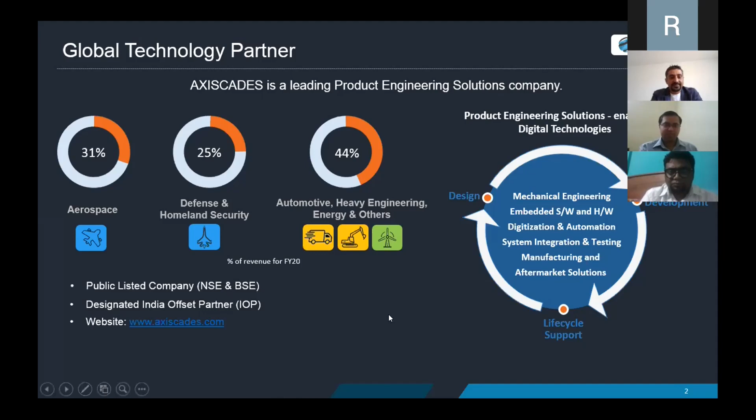So these are our business verticals. We focus predominantly on aerospace, defense, heavy engineering, automotive, energy, and medical devices. When I say these are the key verticals, basically we have a pedigree of close to 3 decades in each of the field.

So we are top partners. We call ourselves the partners to the top OEMs, whether it is aerospace, automotive, or heavy engineering. So this is how we organize. Our services start from the concept design till the manufacturing solutions and to aftermarket sales.

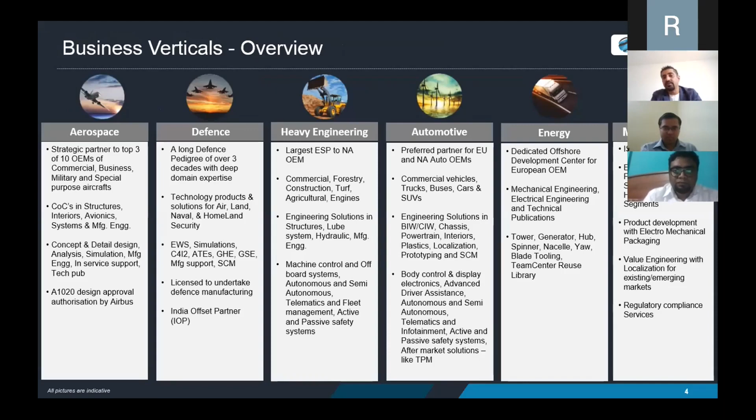If you look at our service offerings, we start from the concept. When the concept is created, some idea is conceptualized, we jump in there with our partners, and from there we help them create the concept designs. From there we help them do the detailed designing, create the prototypes, create the certification processes, and we help them after the sales of the product.

So this is how we are organized. We do the product engineering, embedded and electronics, system integration, engineering analysis and certification. We also help our partners in manufacturing engineering services, product sustenance, and after-sales product services.

We have our units of digital services where we tailor the solutions for the engineering, and we also have our PLM and engineering IT implementation. So this is what is AXISCADES in a nutshell.

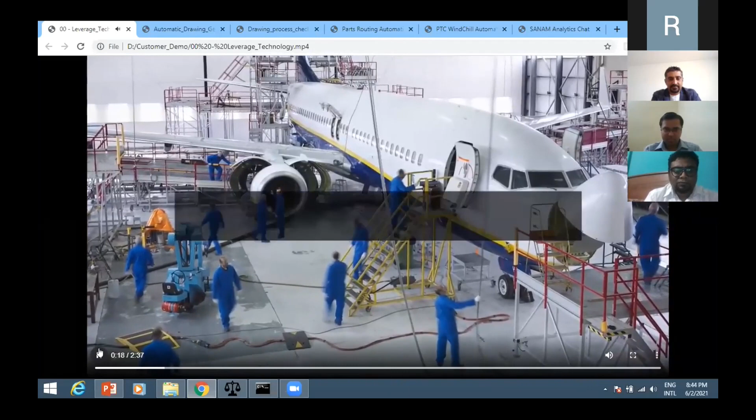We leverage technology for solutions in our known area, industrial enterprise. We provide solutions for agile industrial enterprise. We blend our engineering, manufacturing, and industrial enterprise knowledge with technology to help our customers apply digital capabilities to products, processes, and assets, improve efficiency, enhance customer value, manage risk, innovate and discover new opportunities, and enable insights across enterprise.

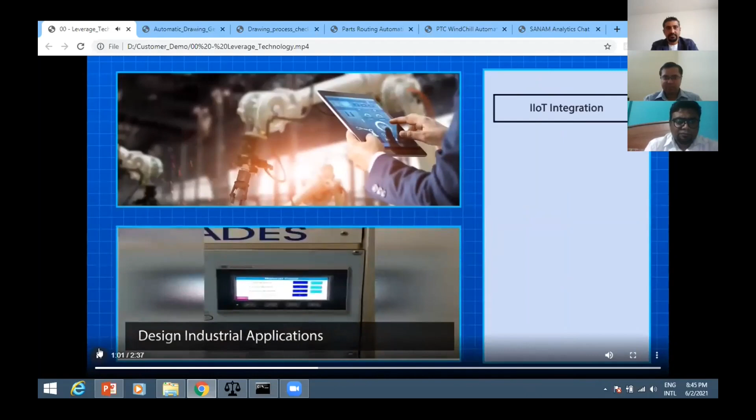We have organized our solutions into 6 horizontals. Connect devices, design industrial applications to view, monitor and control manufacturing operations, and seamlessly collect OT data in real time. We integrate ERP, PLM, SCADA, MES, CRM, and other enterprise applications to a data hub in a decoupled architecture with Kafka as highly available and redundant infrastructure.

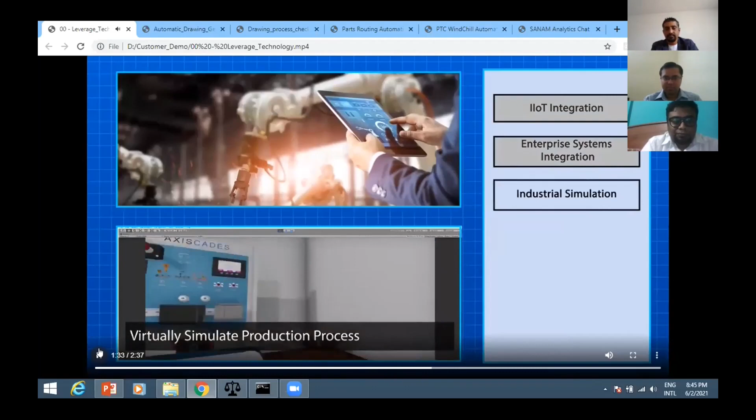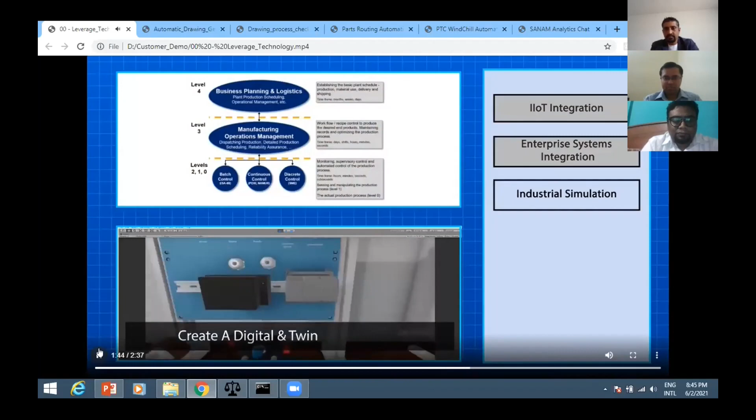Industrial simulation: virtually simulate production process and subsequently plant process before actual production to optimize the control system performance and operations efficiency, and in turn create a digital twin for the production process plant. Enterprise PLM: management of the product lifecycle data based on a product innovation platform. We develop web applications, desktop applications, and mobile applications, including native and progressive web applications.

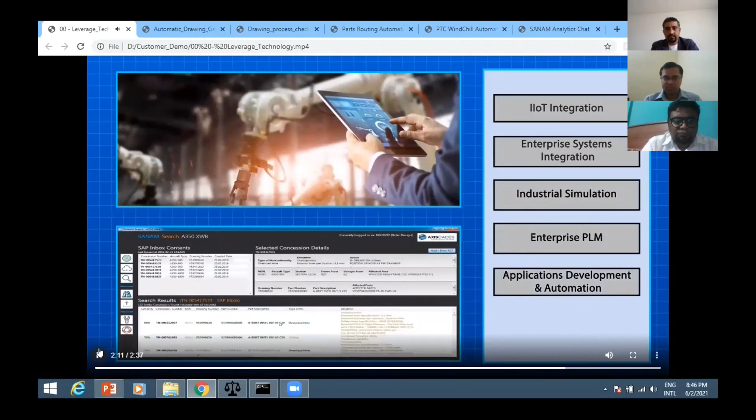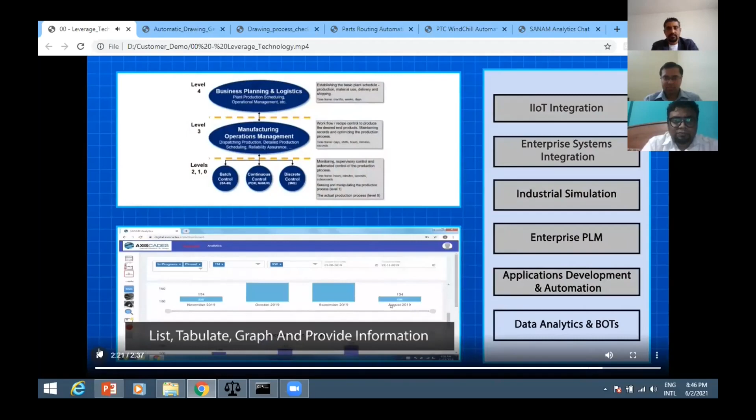We automate mundane processes using robotic process automation, RPA. Visualize, analyze data, and add predictive algorithms as desired with custom applications, and also use BOTs to list, tabulate, graph, and provide information from data with our data analytics solutions.

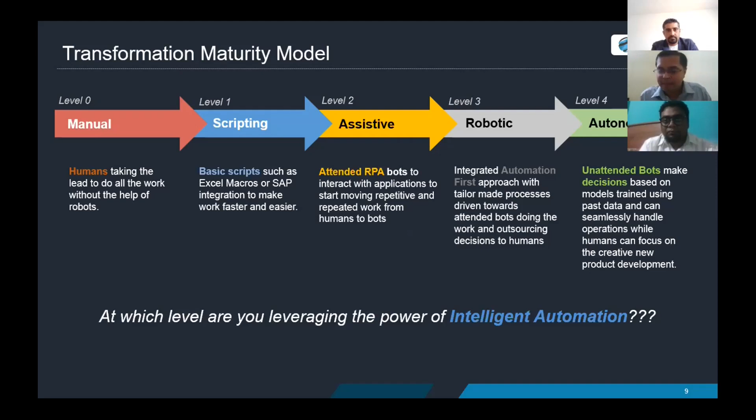So Bharat can take you through automated drawing creation that we've done for some of our customers, which helps to convert 3D models into drawings. Over to you, Bharat.

Yeah. So this is the first case that we want to present in today's seminar, which is automated drawing creation. This was done for one of our aerospace clients. When we received the drawing creation package for a particular aircraft program, this part is basically a composite part, which is known as a stringer.

These are basically longitudinal members of an aircraft, which are present in several hundreds per aircraft. There will be small deviations in their dimensions, and apart from that, they vary from medium to complex geometry. But most of the time, it's similar in terms of shape and form.

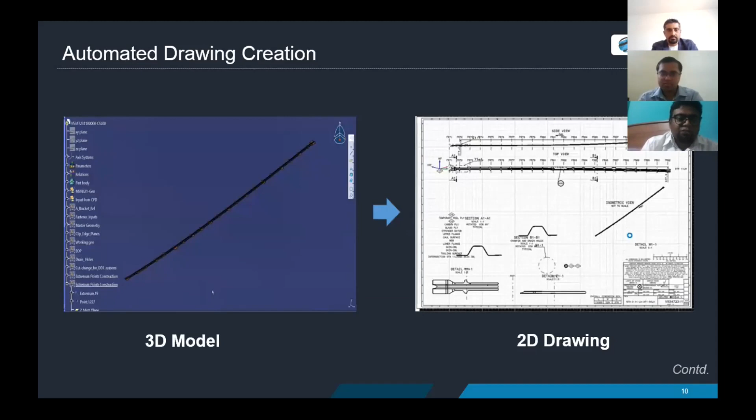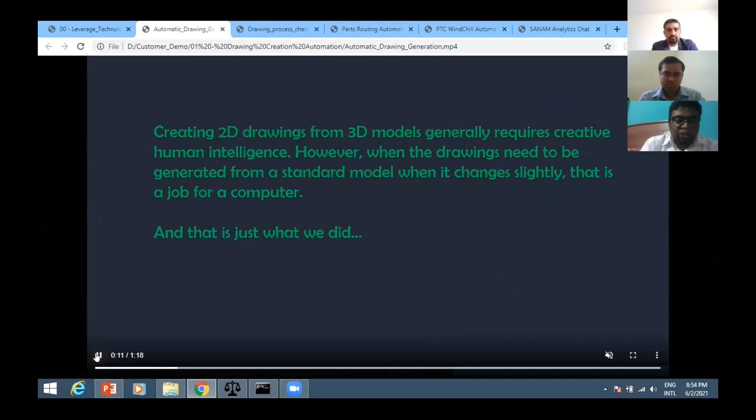So when we received this package to create the drawings with all the information to be presented in sheet 1 and sheet 2, typically a drafter or an engineer would take around 4 to 6 hours for completion, with all the instructions, standards, and views, to make it a more manufacturing-relatable drawing. Okay, so when we received this package, can you pause it, Sudeep, please?

Yeah. So you can see the automatically generated drawing. Let me move over here. In the demo, what you're seeing is that you have loaded the 3D models into the CATIA environment, and using creative intelligence, we have created through VB scripts all the business logic required to perform step-by-step functionality.

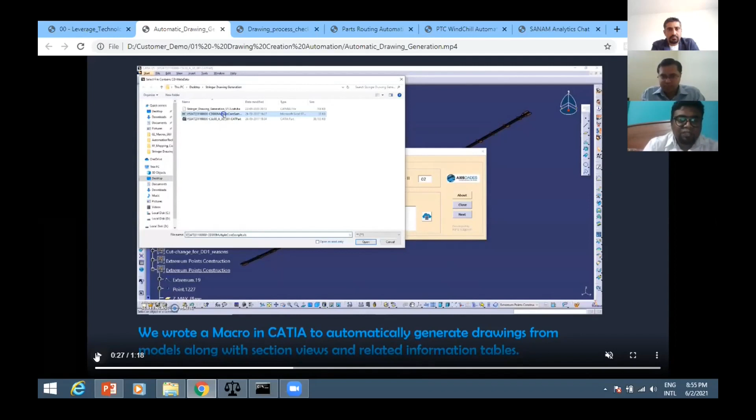So it takes in the basic information in the background once you're keying in and referencing the respective inputs. This part is a composite part, so there is a core sample table, and other necessary information is taken into consideration. Yeah, please go ahead.

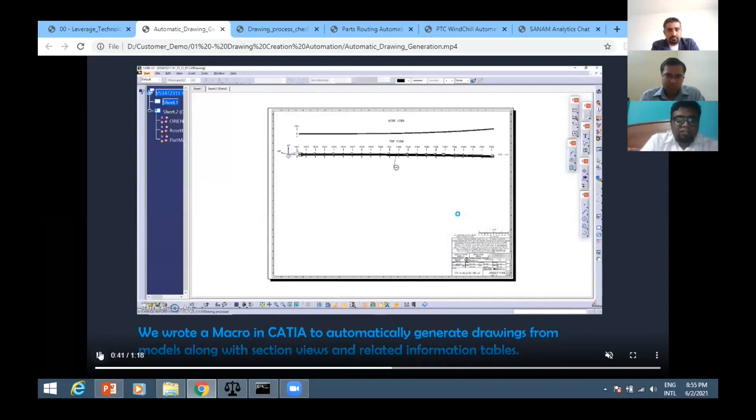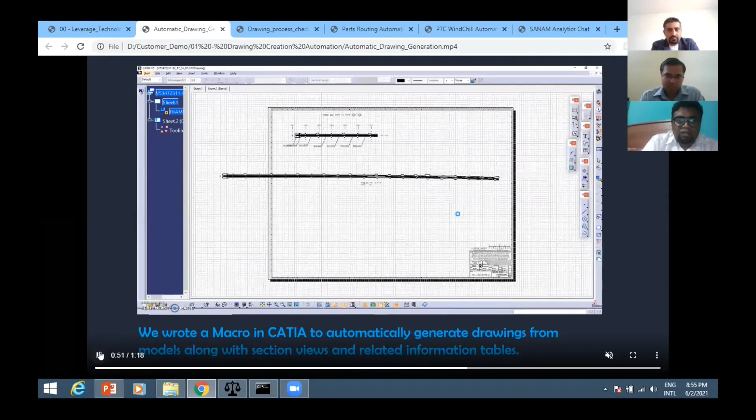So once you key in the necessary information and reference the respective core sample tables, it creates supporting planes, goes into the drawing sheets, and starts creating the views automatically with all the information required for the particular views: the dimensions, the notes, annotations. Now it's moved to sheet 2 to create other sectional views and the core sample tables. Everything just within a minute.

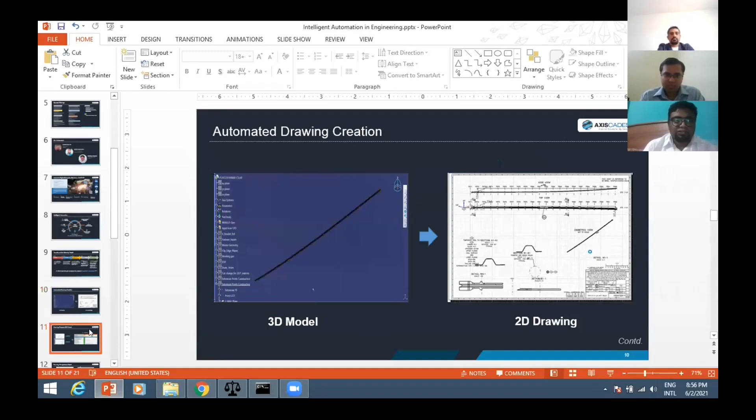So this is the first use case we have done, where it is not only fast, but also maintains the standard of creation. Yeah, you can move to the second one, Sudeep. So the first use case was on the drawing creation process.

Now we have received a lot of automatically generated drawings, and the next bottleneck is going to be quality check. Even though we created the drawing automatically in the first phase, it is up to 60 to 70% automatically generated with the maximum views, and the user still had to spend some time doing aesthetic changes. After that, somebody still has to check all these drawings.

So the second use case for us was to create a quality check macro, which essentially does the quality check using a checklist, the way a QC person would. We understood the entire process of how a person checks it manually, and we built business logic behind it, so that the drawing quality check happens when the engineer or drafter starts the process. You can go to the demo. Yeah.

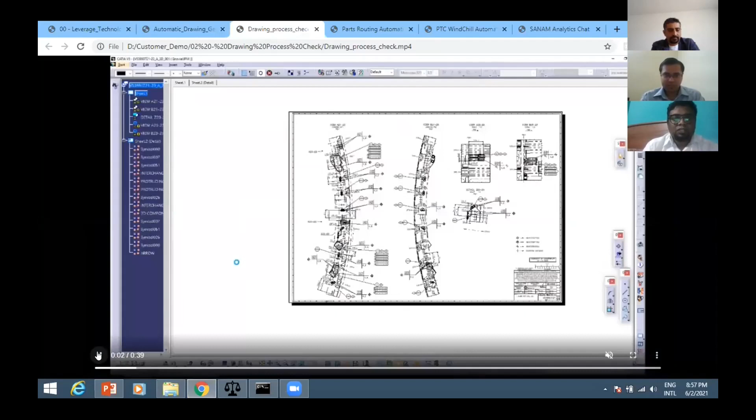So here you are seeing the user invoking the macro within the CATIA environment and keying in all the necessary information required for this quality check. The macro is now interacting with Windchill, which is our CAD data management software for this program. You can see the progress happening at the back end, where it has done all the necessary checks, and then it generates a report with all the status in color coding, and also remarks where the drafter or checker has to concentrate on correcting.

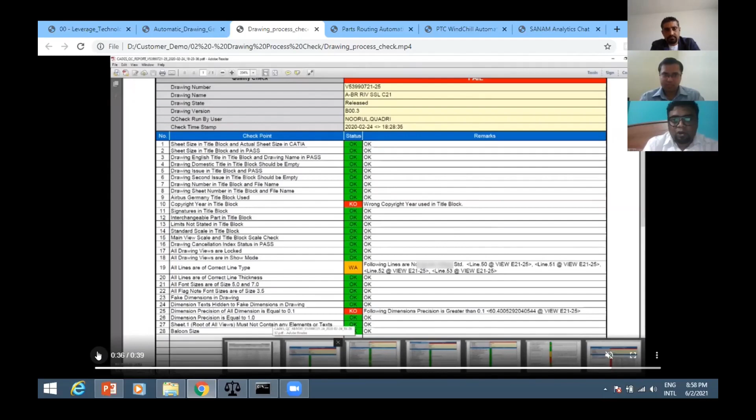Yeah. And another useful and interesting case study we have is the drawing comparison, not a macro, I would call it a bot, which basically works.

The previous one you saw inside a CAD environment, where it was running the macro and doing all the necessary checks. But over here you can use any kind of CAD-neutral formats, like your DXF or your STL or IGS, etc.

And the user loads basically the two revisions. You're seeing here a version A and a version B, where you have your latest revisions and the oldest revisions present here. And you run this option, and it also compares and checks for all kinds of dimensions, notes, and other textual information which are added or removed, and it highlights them in different colors, and a report is provided for the same. So we'll have just a quick demo for the same.

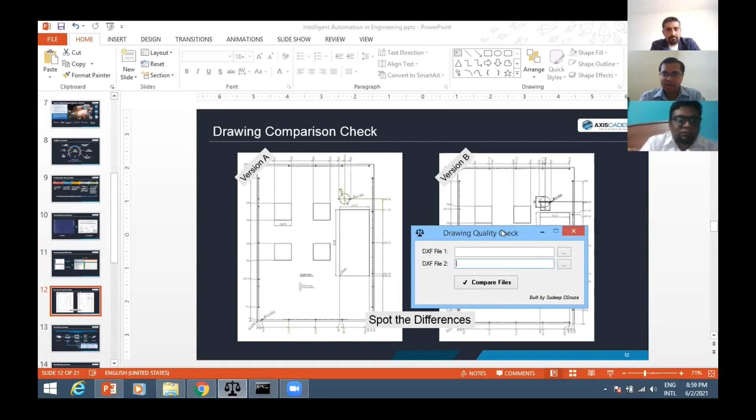Right. So over here, what we've done is we've actually used this to build both a desktop application as well as a web-based application. So what I'm showing you over here is the desktop application. On the screen over here, what I request you to do is quickly see if you can spot the differences. Now, these are two different versions of drawings, and the previous case study that Bharat showed was process checks, which means it checks the drawing dimensions, the drawing tables, the size of the font, etc.

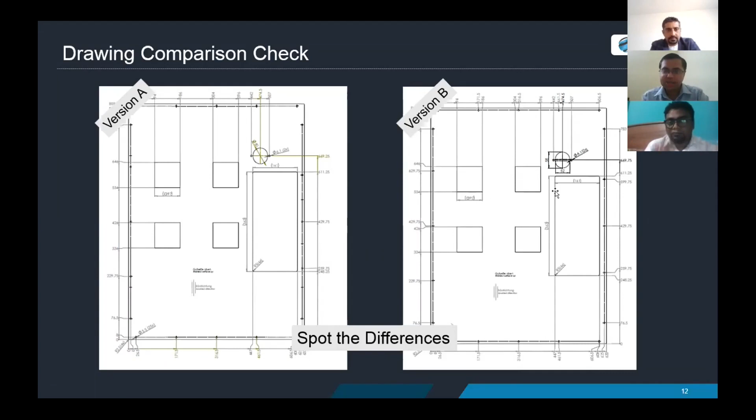But there are drawing checks that you need to do in order to do a comparison to see how the drawing has changed between different versions. Drawing is mostly dimensions, so identifying those dimension changes allows us to identify the drawing changes. So in this case, what I'm going to do is select two drawings of different changes and say compare.

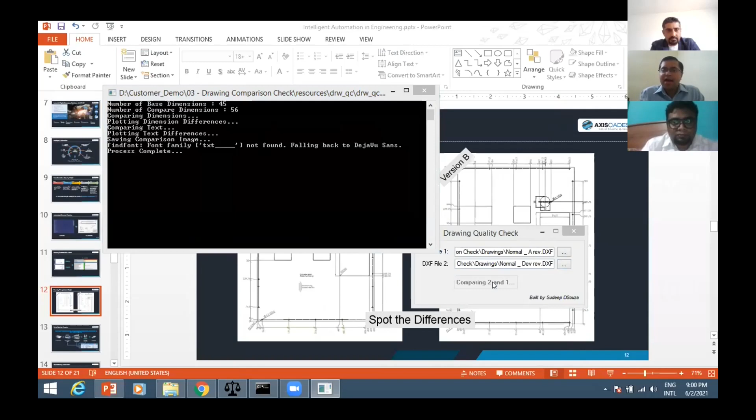So what this does is it goes through those drawings, figures out where all the dimensions are, does a comparison between both of them, and then gives us an output image highlighting the differences on both those drawings. So if you look over here, this is one of the drawings that I've selected. This is the other one. And if I zoom in, you can clearly see that it becomes very easy for a person who's doing quality checks on the drawings to figure out what has changed.

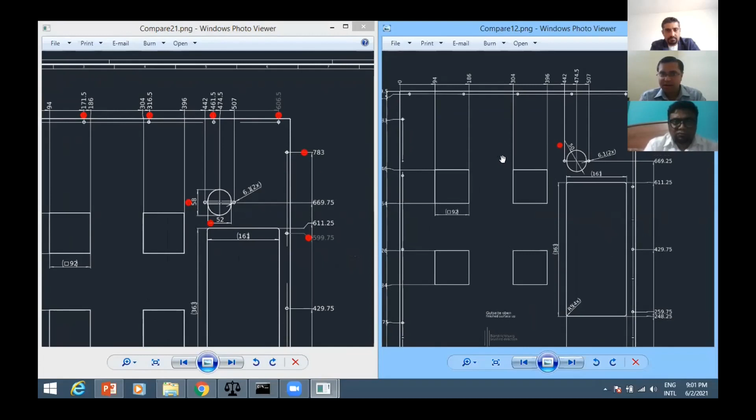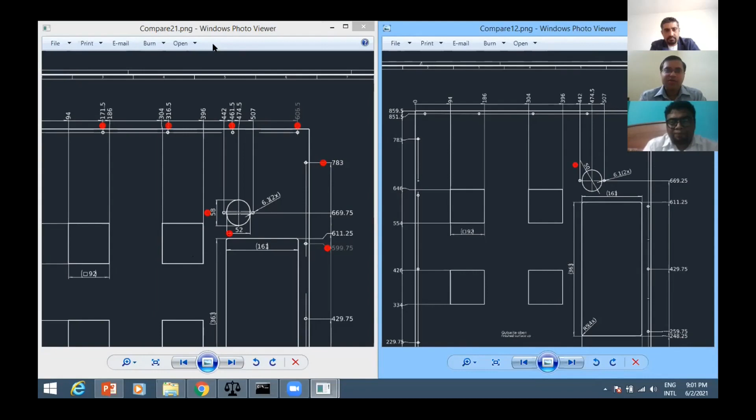So quickly, this has now got a 58 to 52. Those dimensions are not there in this drawing. There's a 50 dimension, which is a diameter dimension that's not there in this one. The 606 is not there over here. The 505 is there. So all the red points that you have over here, those are the dimensions that are missing from this one or changed, right? So that way it becomes very easy for a person who's doing a comparison check to actually figure out what has changed between drawings.

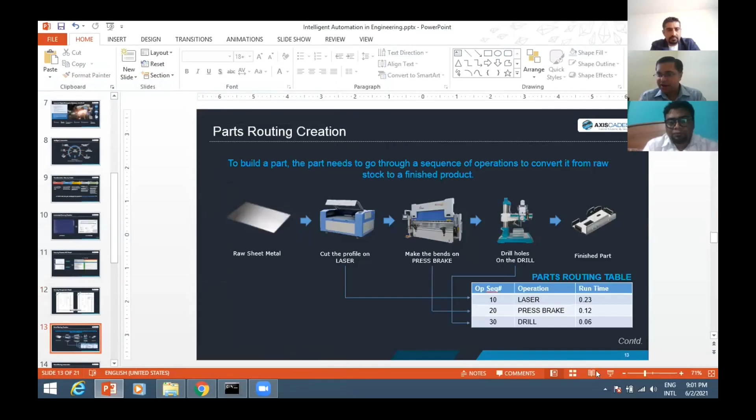Another case study: after we've moved from generation of drawings to process quality check of drawings, we've then done the dimension comparison between drawings. The next step of this entire process of moving from design to your shop floor is figuring out which operations need to be done from the drawings and carrying those forward into the routing that needs to be created for the shop floor. Take this as an example.

This is a raw material sheet steel part that needs to be completed into a finished part. And that has to go through multiple stages on the shop floor. The first thing is it needs to be cut out either on a laser or on a plasma. Then you need to do the bending operation, and then you need to do the drilling operation in order to get those holes, right?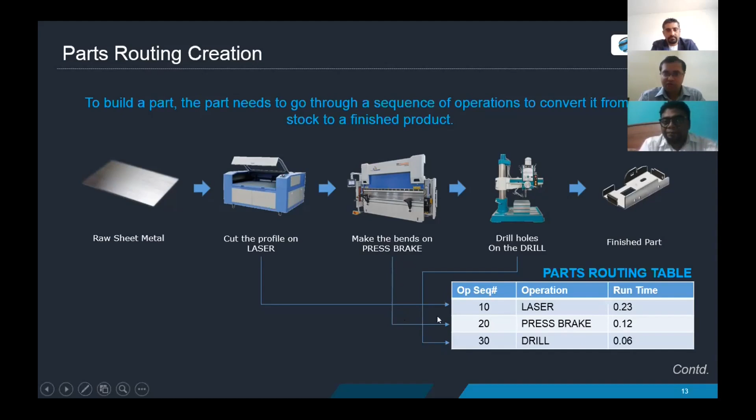So as you move across these stages, the one thing that you need to do is store this information in some system, a PLM system or any system that has information that needs to go to the shop floor on what operation sequence needs to be done on the sheet metal to get it into the finished part. So this quick example says your laser is your sequence 10, your press brake or bending is sequence 20, your drilling is your sequence 30, and so on, right? And then that gives you the finished part. Having to do this manually is quite a lot of work.

For a lot of drawings, people have to open each drawing up, figure out how many bends, what the thickness is, what the material is, compute your standard cutting time, et cetera, in order to push it into JD Edwards. So there could be a lot of materials. It could be sheet steel, it could be a tread plate, it could be a C channel, it could be an L channel, it could be a bar sheet.

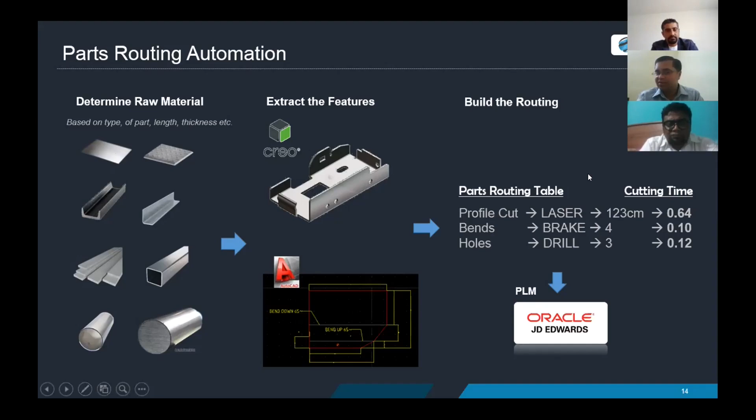So figuring out what type of raw material, which features to extract, how do you convert them, all of this normally is being done by a human. We automated the entire process. So let me quickly take you through a video on that. In this process, like I said, what we did is we automated this entire thing.

We built a bot with an easy to use graphic user interface. You can run it off a batch of parts. You can run it off a single part. You can run it off a single Excel sheet, which contains a batch of parts, or multiple sheets as well. So once we go through this entire method of configuring the tool, what the bot does is it picks up automatically all of this information. It automatically picks up the raw materials. It picks up the features.

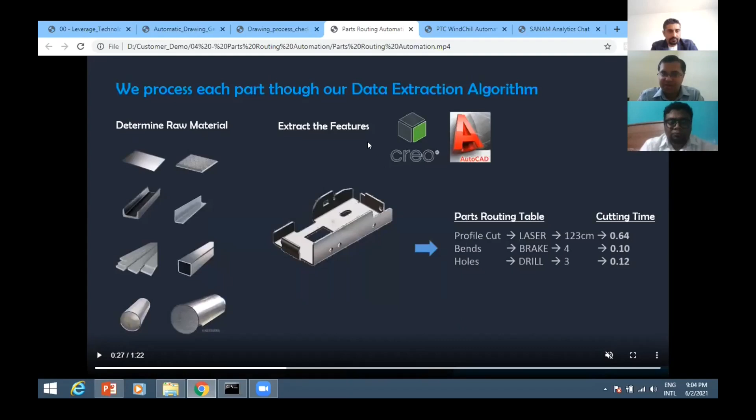We've done it for Creo. We've done it for AutoCAD. Creo is on a 3D model. AutoCAD is on a 2D drawing. And we've done it for both of them. So using that technology that we've built, it does the entire picking up of the raw materials, the number of holes, the bends, the profile cut, determining what type of part it is. It basically automates the download from Windchill, evaluates those parts, figures out the extraction of the data, as you can see that it's doing, and builds this entire routing information.

In some cases, it even asks the user if it cannot figure it out. The tool asks the user, okay, I don't know this information. What should it be? Or I found discrepancies between what you have on the drawing and what you have already in JD Edwards, or whatever your PLM system is. So this section gives us the computed routing of what the application thinks it should be. This is what exists in JD routing if you want to make a change. And you can then choose what routing you want to put into JD Edwards or whatever your PLM system is.

And it now uses robotic process automation to write that information back into JD Edwards. So as you can see over here, it's signing into JDE, and then it can put all the required information back into JD Edwards. So automating this process end to end, all the user needs to do is upload an Excel file. The system takes care of the rest.

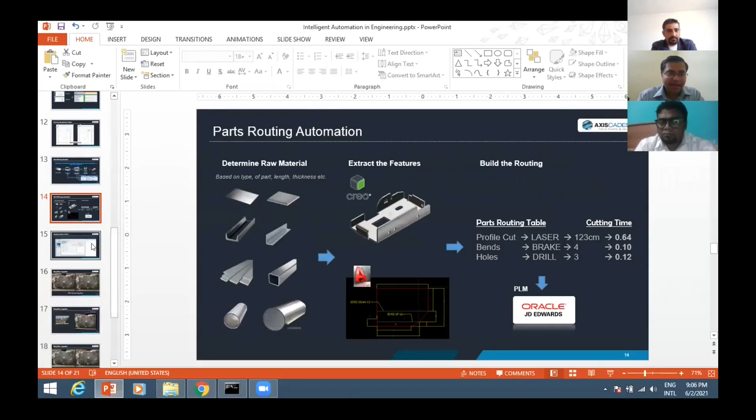It downloads the parts from Windchill. It figures out the raw materials. It figures out the features on the part. It then also uses robotic process automation to upload those parts' routing. It also calculates the standard runtimes, and then uploads all that information back into JD Edwards. This is a big time saving and is much, much faster. For a user, it would probably take an hour per part to do the downloads, the checking, and everything. Our system probably gets it done in less than 5 to 10 minutes. So overall, that is what we do. We use technology to save time.

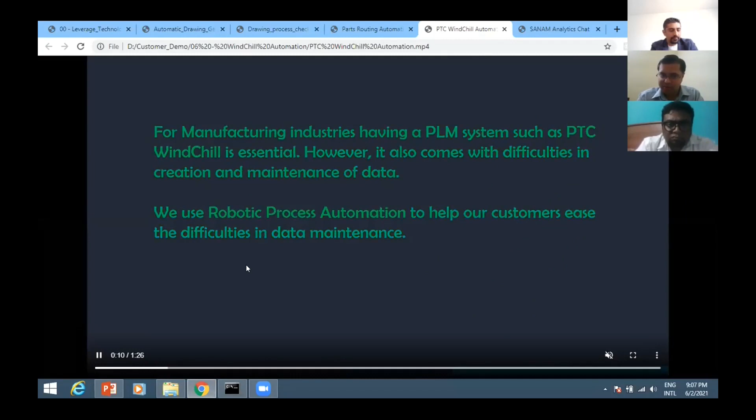We also have, in order to do the maintenance of PLM systems, in a lot of cases, we need to run robots and upload or download data from PLM systems. In that sense, also, we've helped our customers. So we've written bots in order to upload data and download data into PLM systems. In this particular case, we've got a robot which is primarily robotic process automation. There's no intelligence built into this one, but you can see the amount of time it saves.

So in this case, you need to upload variant information into the PTC Windchill system. And what we're doing over here is just that. We've completely automated this process in order to upload data into Windchill. As you can see, this whole information automatically gets uploaded into the Windchill system, and it does it really fast. All of the selections, all of the items that need to be selected, everything happens automatically.

Even in some cases like this, these are Java-based interfaces, and Java-based interfaces are normally extremely difficult to build RPA bots on. But we've even gone to the extent of automating Java-based interfaces using a combination of mouse clicks and optical character recognition.

So that whole stance and the overall time savings that get impacted, or the increase in productivity that we have doing building robots like these for our customers, really, really improves productivity. And more than that, it's even more efficient to be done by a computer, because human beings over time tend to make mistakes. Lethargy sets in. Computers are not affected by lethargy. And because of that, they keep repeating the actions over and over again, increasingly efficiently.

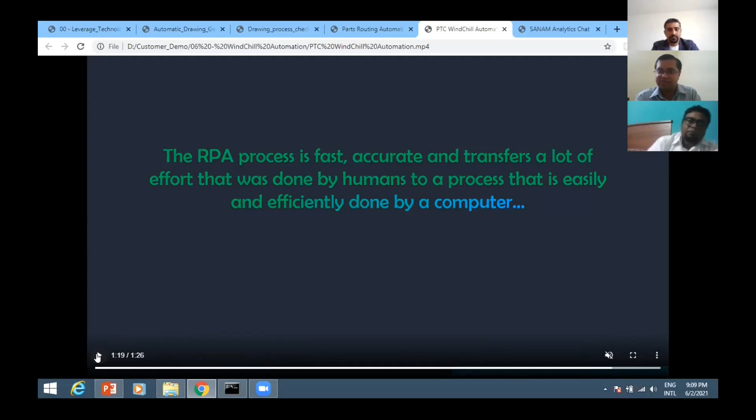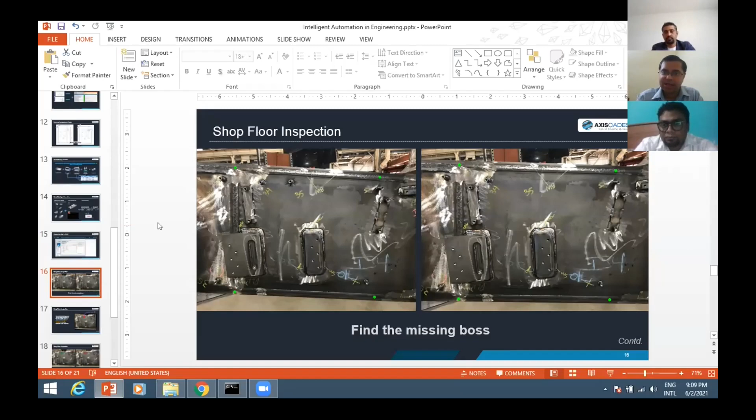So once we have all that information, let's then take a dive into the shop floor. So one of the other interesting projects that we've done for one of our customers is visual inspection. We've done visual inspection on drawings, right? Drawings are digital data. But how do you do that on physical products? Physical products are what we do after we've completed the drawing stage and we've produced those products.

Now, in this case, there are two frames, right? The frame on the left is the frame that is actually the true frame, or what we call the gold standard, because it's got all the information on it. It's easier to visualize this on two different images. The one on the right has the boss missing. So when I'm talking about bosses, I'm talking about these protrusions out here. These bosses are the ones that have harnesses or piping routed around them.

In order to get them easily installed, these harnesses get routed over these bosses so that they just sit neatly in the final assembly. So if one of these are missing by accident, and all of these assemblies are done by people, so it is quite possible for a person to miss out on welding these bosses onto the frames. So say, for example, some of these bosses get missed out.

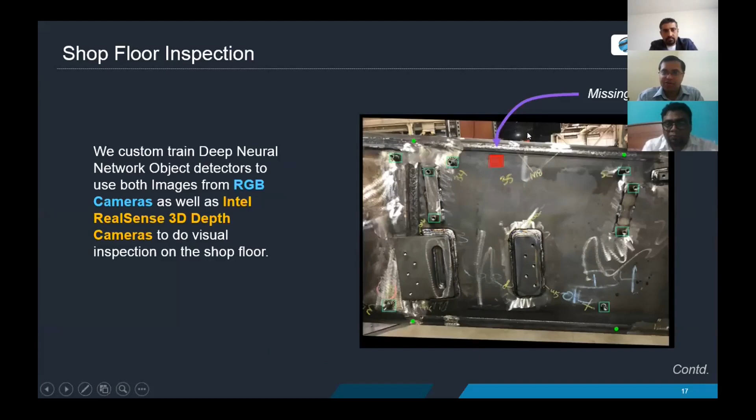In this case, can you identify which boss got missed out? You can see that there is one over here near the number 35, and that one is missing in this picture. So that's the missing boss. Now, having this type of visual inspection done by a human being is also tricky, because he now has to go through a checklist saying, okay, X, Y coordinate, Z coordinate, there is a boss. X, Y coordinate, there is a boss over here. Which boss is it there?

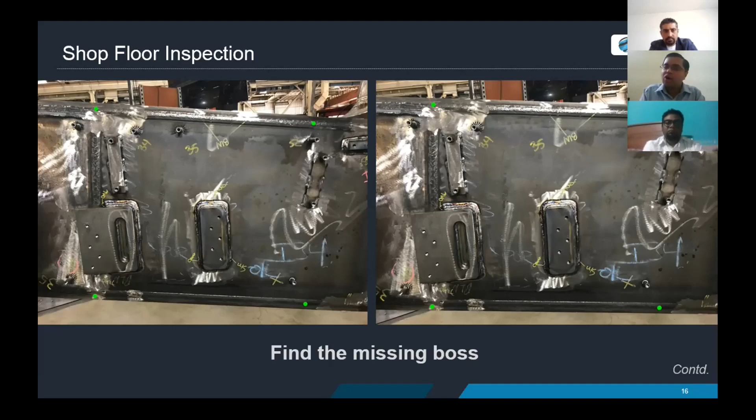Are the ceramics still there on the boss? Because once you weld it, you've got to remove the ceramics. So all of that information also needs to be captured. And having that done by a human being over time, the assembler can make a mistake, the QC guy can make a mistake, and that can also go into production, right? But in order to solve this problem, in order to make it easier for the person who's doing QC, what we've done is we've built a bot to do that.

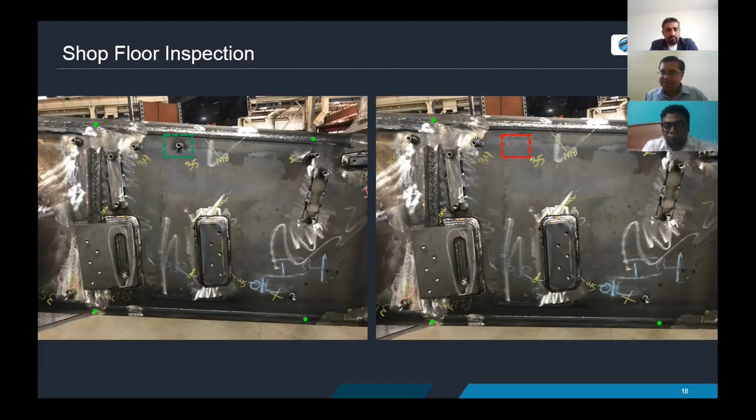So what we do is we have cameras that are situated on the shop floor that capture images at the final assembly point, after the welding has happened, and then we pass this through a bot. So let me show you that bot. In this case, I'm showing you pictures because it's easier to do so. So there are two pictures over here. Those are the same ones that I've actually shown you on the slide, right? I'm passing that through the bot.

What it does is it takes each of the images, and because these images are not aligned, they're from two different locations, they're from two different photographs, we realign them so that they can actually sit correctly on top of each other. Now, the truth information can either come from an image, or the truth information can also come from a drawing. The truth information can come from a model as well. So in this case, I'm using images just because it's easier for us to visualize.

What we did is we built a deep learning trained convolution neural network model in order to detect where these bosses lie on each of the images, overlap the images, determine where the bosses lie, and determine which ones are missing. So in this case, you can see that it has highlighted all the bosses that are there in green, comparing it to this image.

And this is the area that it has found where the boss is not there. And as you can see, it has realigned the image so that it sits correctly. You see these fixture points in green that I've highlighted. So it uses those green points, realigns the image to where it is, and then sees where the bosses are, and overlaps those two images together to find out where the missing boss lies.

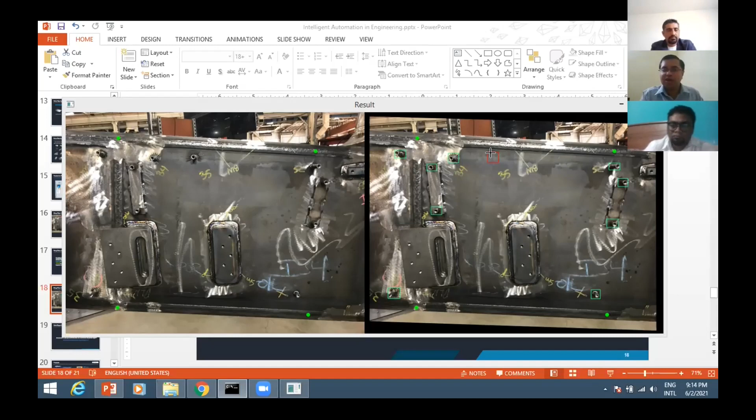And that's the type of technology that we're talking about. What we're doing is using technology to make people's lives easier and make human beings more productive. All right.

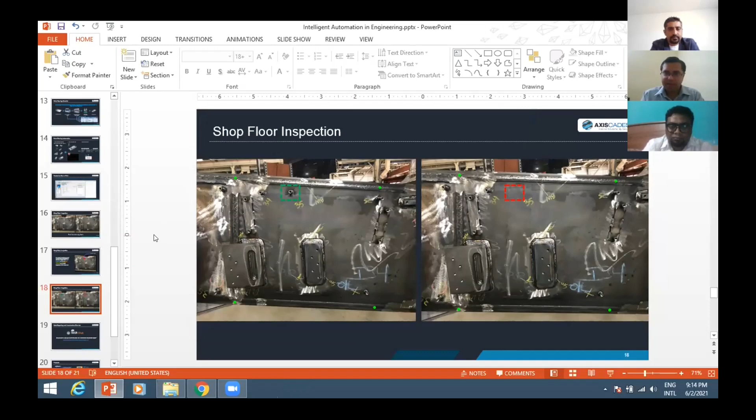So in that whole frame of things, once we're on the shop floor, we need to do time studies in some cases. We do time studies because we need to actually find out where and how to improve productivity. Like I said, the whole intent of what we do is to help people improve productivity.

And in that whole vein of things, we've built a time measurement system. You get time measurement systems in the market like Time Study Pro, but most of them are not customizable for people's needs. And we built this so that we get control over that code, and we can now build these types of applications to meet the needs of our end customers.

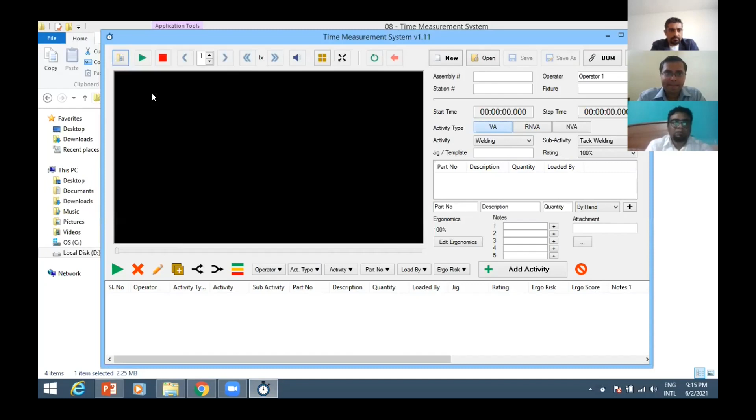So in this case, what we do is we just open a video. I put it on mute because this video is a bit noisy. So we look through the video, and you can see the clock running over here. The clock actually determines where we start and stop these videos, so we can pause it, choose our required value add. In this case, it's going to be inspection, and then he's measuring.

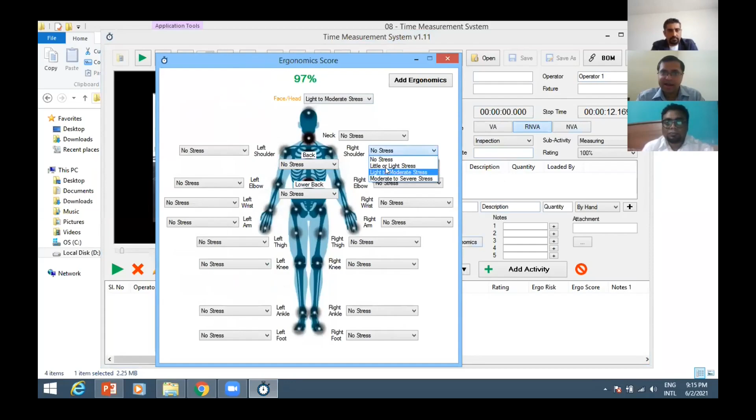We can put the assembly number, the station number, we can choose which operator is doing the work, and a lot of other configurable items over here. We can choose the parts. We can even do ergonomics, because sometimes ergonomics is important, to identify whether it is high left shoulder, right shoulder, determine the ergonomics, and then put notes in and add activities.

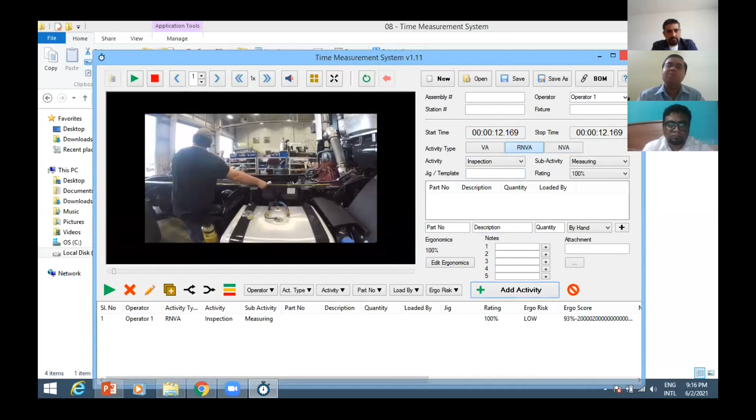So once we do all of this, the whole thing generates out to an Excel file with reports. So what we've got is also a system that we can use to help improve productivity even by doing time studies.

Okay. So that's an entire set of quick demos that I've shown you that we as AXISCADES do to help improve productivity using robotic process automation and artificial intelligence with machine learning to make decisions, like you've seen on our shop floor detection robot, which uses computer vision in order to help improve productivity, right?

Now, once we have all that data, we collect data in several cases. But how do we generate reports? How do we interface with that data? How do we interact with that data set? In most cases, it requires specialized teams of people who know query languages; you need to know software in order to interact and build those reports. You need people who know business intelligence software like Tableau or Power BI.

So in order to help business users, what we've done is we've built a chatbot. This is a custom chatbot that we've built, which you can ask questions in order to allow it to give you those answers. For example,

I'm actually using Zoom right now in order to share my screen and talk, so the microphone won't work because I can only capture one voice audio at a time. But I've also integrated a microphone so you can not only type your questions, but also ask your questions through voice. That helps with the NLP part of our decision-making capabilities. We do speech to text and then use the natural language processing engine in order to convert that information to a chatbot.

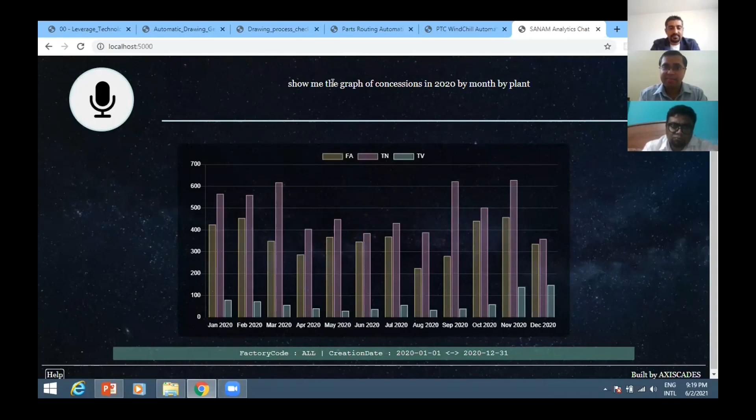I can even get a heat map of concessions by plant by aircraft. Because this was done for an aircraft customer, the aircrafts are coded, but you can see the heat map it gives you by plant by aircraft.

So this is the plants, this is the aircraft. I can also say by plant by program, and you get a heat map count as to how the number of concessions are by plant by program.

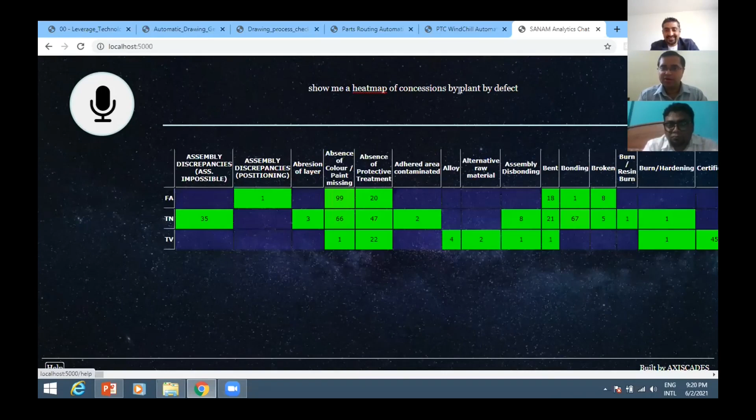Or I can do it by plant by defect, for example. This is really long, so let's just do defect by plant so I can shift axis.

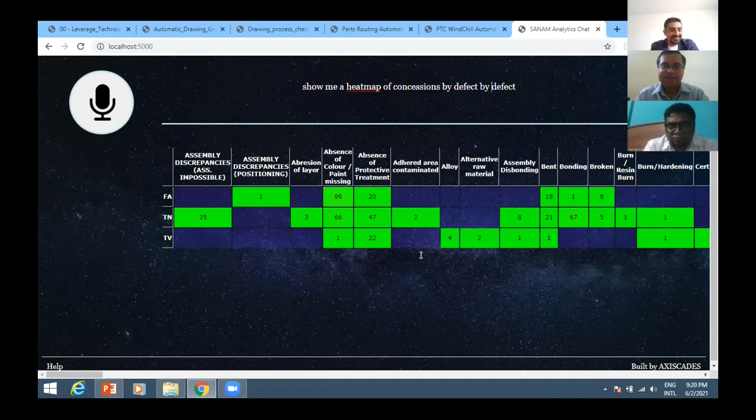Overall, you can see that it becomes very easy to view by plant. I actually gave it by plant by defect, so it gave me an overall view - as you can see, it gives me by plant by defect.

It's very easy now for a normal person or a business user to interact with your data using natural language, use a chatbot to get business related information and data, and present it in a form that's easily used by people.

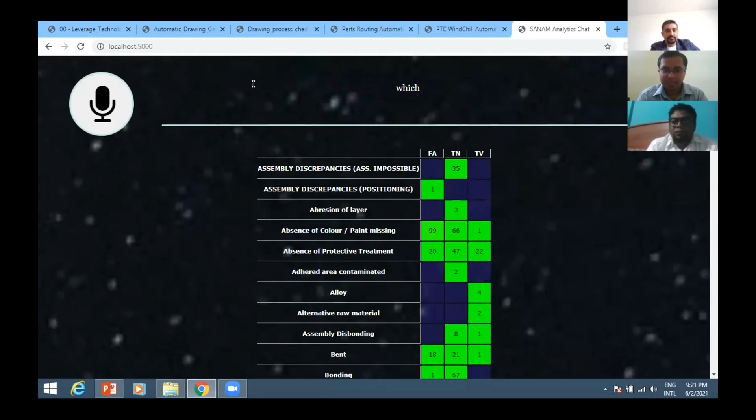I can even ask which month had the highest number of concessions in 2020, and it'll give me this type of data. So this is the month that I had the highest concessions - the month of November.

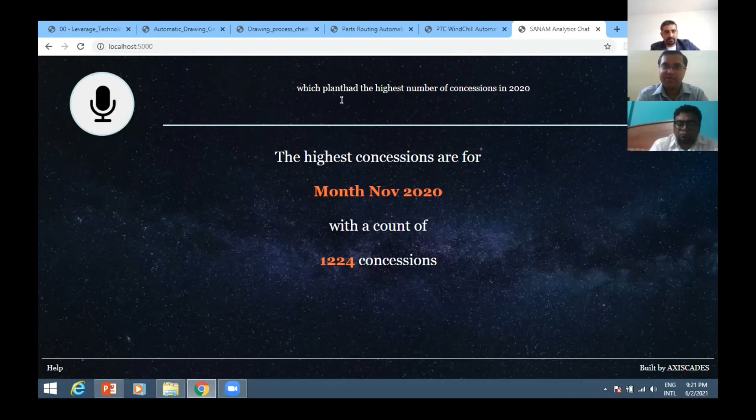Or I can say which plant had the highest number of concessions, or which defect. It actually gives me which defect has the largest number of concessions, such as geometry deviating. So this type of querying and interaction with databases makes it extremely easy for people to use in order to build reports or give information out to users.

So that being said, we've covered a lot of case studies over the last 30 minutes of the capabilities we have to help use technology to improve productivity.

And that's not all, we also build products. We've got our own line of products developed during COVID time. In our current scenario, we try to help people using our products like the WeCare EST and the People Counter.

The WeCare EST is an in-house built product, completely built from scratch - from your electronics to the software, to the casing, to the web application, to the mobile application. It integrates everything together into an easy thermal screening system which can be installed on any door, anywhere that you need to do thermal screening.